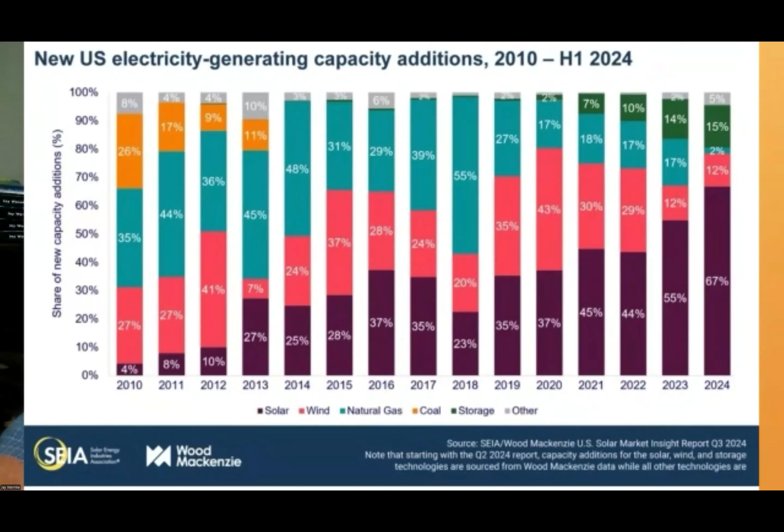Texas was the leading state for solar installations with 5.5 gigawatts coming online, nearly twice the capacity of second-ranked Florida. While commercial and utility-scale solar were booming, the residential segment of the market actually declined during the first 6 months.

This was primarily due to changes in California's net metering policy, where NEM 3.0 essentially reduced by about 75% the amount of money utilities would pay residential customers for feeding excess energy back to the grid. Since that implementation about a year ago, residential solar installations in California have declined between 57 and 85%, according to the California Solar and Storage Association.

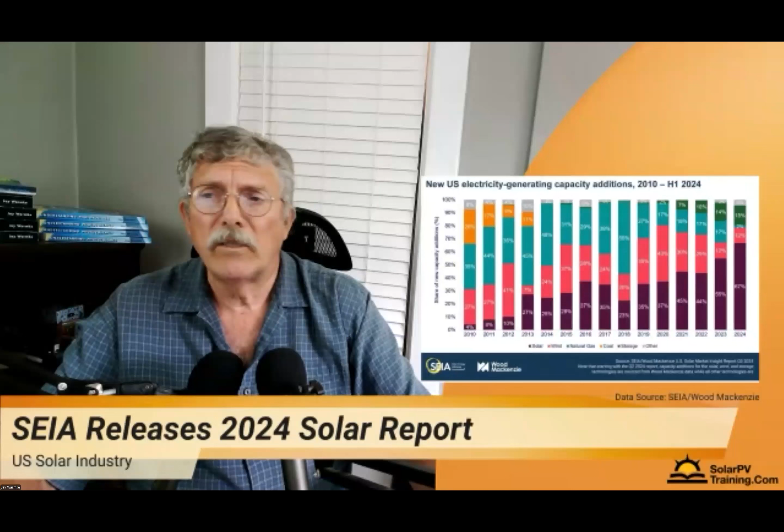Prior to NEM 3.0, California accounted for about one-third of all residential solar installations nationwide, so this has had a knock-on effect nationwide. When you add that into the mix, solar installations nationwide are declining at about 19% at the residential level over the first half of 2024.

The impressive rise of U.S. solar manufacturing capacity is very likely a matter of the classic good news, bad news kind of thing.

The good news is that solar module manufacturing capacity now exceeds 31 gigawatts, a fourfold increase over what was available prior to the IRA passing. Much of this increased manufacturing capacity is directly related to the 10% tax credit add-on for domestic manufacturing. If you use domestically manufactured products, you get an extra 10% tax credit when you install those components.

Now, the bad news for those who wanted to develop a domestic supply chain is that a significant chunk of these are actually Chinese companies simply setting up manufacturing facilities here in the US. These Chinese companies will have at least 20 gigawatts out of the 31 gigawatts available within a year here in the US, according to Reuters. The Chinese firms building plants are well-known names like Jinko Solar, Trina Solar, JA Solar, Longi, Boviet, and Canadian Solar, which always cracks me up that that's actually a Chinese company.

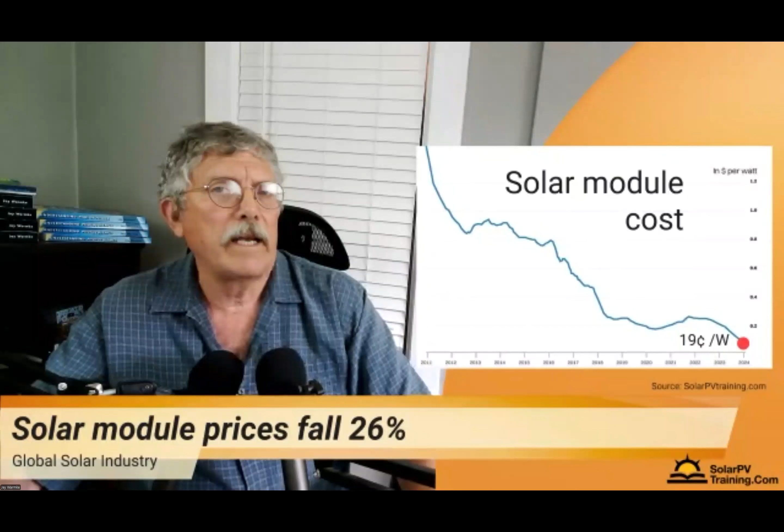For example, Swiss solar panel maker Meyer Burger announced that the 2 gigawatt manufacturing facility they were going to install in Colorado, at an old Intel semiconductor plant, is actually not going to happen. They've cited higher interest rates as well as declining module prices, which are really the result of low-cost Chinese modules coming onto the marketplace and increasingly pushing down the price.

In fact, globally, the solar industry has seen a 26% drop in the cost of solar modules in the last year, down to about 19 cents a watt, according to S&P Global Commodity Insights. And that is the news from the solar industry for this week.

Yeah, Pete, you've got something? Yeah. Does anybody, do you or anyone know how frequently the net metering 3.0 in California settles the account? Is it weekly, monthly? Where are they at on that?

Oh yeah, I think it's monthly. I'm pretty sure it's allocated on your bill, so if you're feeding back in. But it used to be, prior to this, that you would get full retail, and I think even a little above retail for it. And then they kicked it back down to avoided cost, so now they're only paying wholesale.

The knock-on effect of that has been, in California, a significant drop in the amount of solar installations because the economics of it are not as pleasant as they once were. But also a huge amount of solar storage is being put into these systems because essentially they're setting it up for self-consumption. It's like, if you're only going to pay me 4 or 5 cents, I'm not going to sell it to you, I'm just going to keep it. So you can put in batteries and do the solar storage.

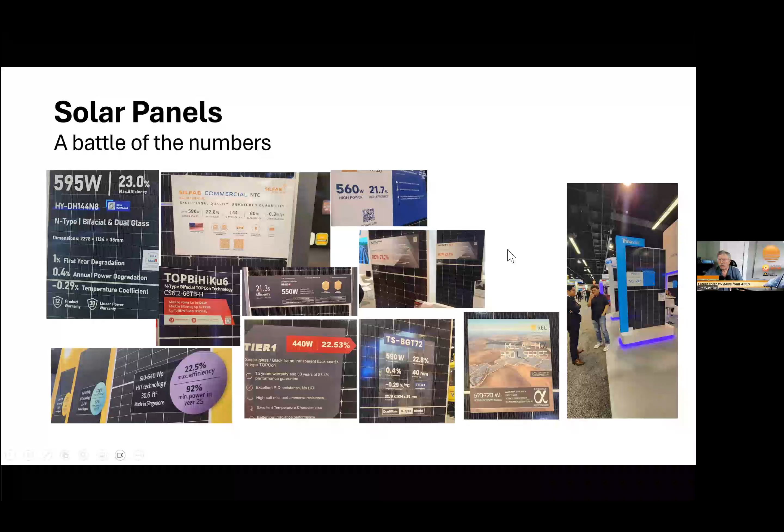I always think of these things like solar panels are sort of like boom boxes in the 80s. Everything gets bigger and bigger while the rest of the world is getting smaller. But there is a limitation of course, like 50 pounds from OSHA as far as one person carrying it, and I think a lot of these bigger panels have to be targeted towards the ground-mounted marketplace, because trying to get these whales up on a roof would be difficult.

Yeah, I should say on my biases, we do have enough space, we are going to do a ground-mounted system, and actually choosing the format of that to take up as much space as necessary to meet our demand. By the way, if you don't know how to calculate demand, I know a guy who runs a really cool course you can take on calculating your demand and building your system.

Choosing whether to go with fewer large panels or more small panels, with fewer larger panels I can use fewer optimizers or microinverters, depending on your architecture, but on the other hand it changes the geometry of your mounting system. So I haven't found a set of good principles on that, except for empirically building it myself. If anybody's already really good at doing the calculus around panel size and racking efficiency, I'd be a very happy student.

I'd be curious to see if there was a decline in bifacial panels. Bifacial had a big, robust growth spurt because the tariffs imposed on imported panels forgot to include bifacial panels.

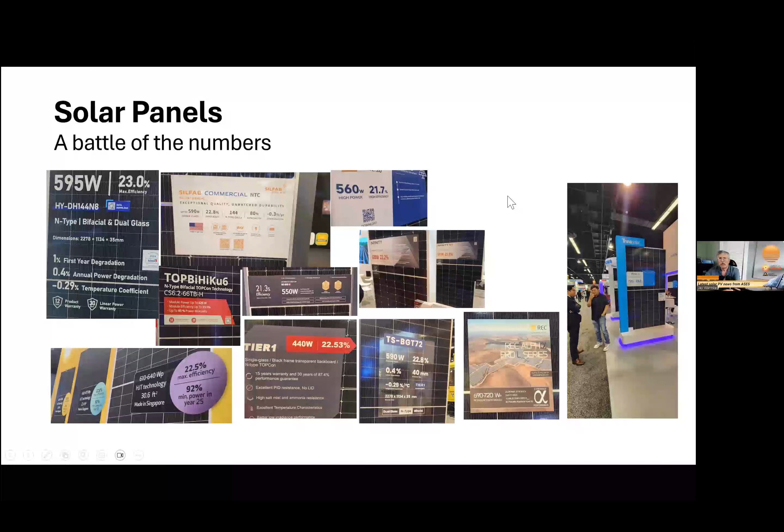In case you're not familiar, bifacial panels can absorb power from underneath as well as above, with cells on both sides. They wouldn't really work well on a rooftop mounted system, except maybe a ballasted system, but they're definitely good for ground mounted systems, especially on sand or snow fields or anywhere you get an albedo effect where light reflects up to the underside of the panel.

Amen. Yeah, in fact I got some stats here. I tried to show some key concepts and the ranges I saw at this meeting. Total watts, I don't think there were very many places under 400 watts at this point, but the trend is towards bigger stuff.

Conversion efficiencies are in the high teens and low 20s. I did a little research here, and that looks like it's been growing about 10% over the last half decade.

Temperature coefficients are getting very, very small. For those of us who live in cold temperatures, that's a bit of a mixed blessing, because I might actually like the extra efficiency I'd get in the winter, but it is what it is.

Bifacial panels, now you have to be careful when you read these things, because they'll say they have 80% or 85% bifacial efficiency. All they're really saying is the rear-facing panel is some fraction of the efficiency of the front-facing panel. But what's being reflected off the ground below, whether white stone, sand, concrete, or whatever it be, gives a number much smaller than 80% additional. That number is probably going to be in the sort of 30%-ish range.

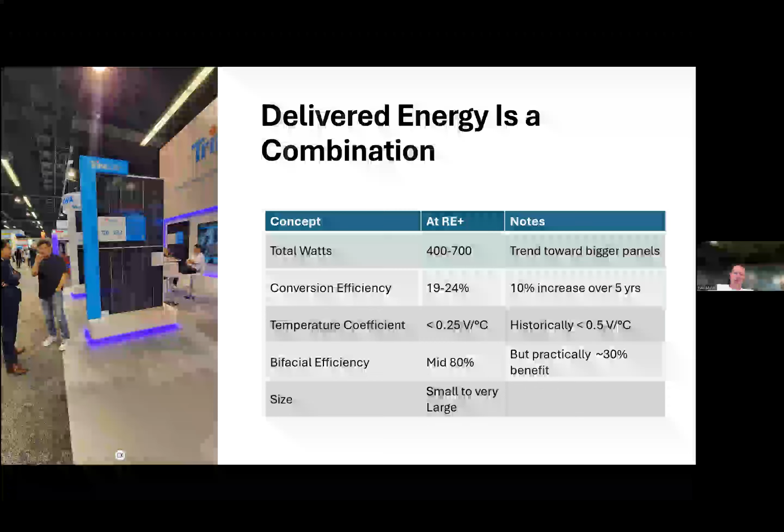Again, that's one of those things where that 30% number, you should have a wide range of uncertainty about whatever number you use. And of course, size ranges from very small to very large.

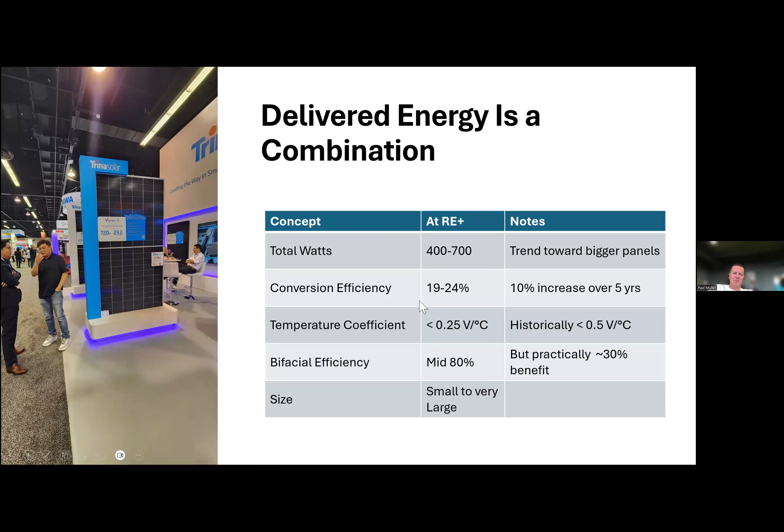Just as a benchmark, if you're paying more than 30% more for the panel because it's bifacial, and you're getting 35 or 30% more power, that's going to be your break even. So it doesn't make sense to go bifacial unless the cost benefit works out for you.

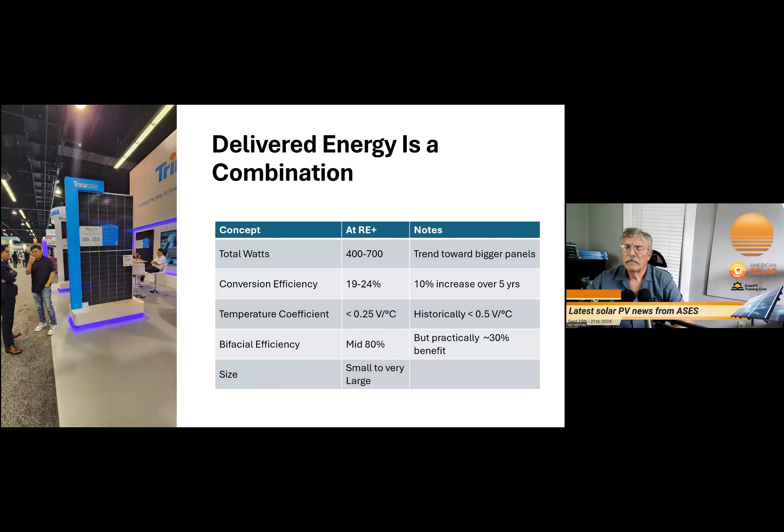Absolutely. I did see a couple of things. Tesla has been the preeminent, at least from a marketing perspective, proponent of shingles on the rooftop. There were several other companies, some new entrants, especially for metal roofs, with products that looked a lot like metal roofing material.

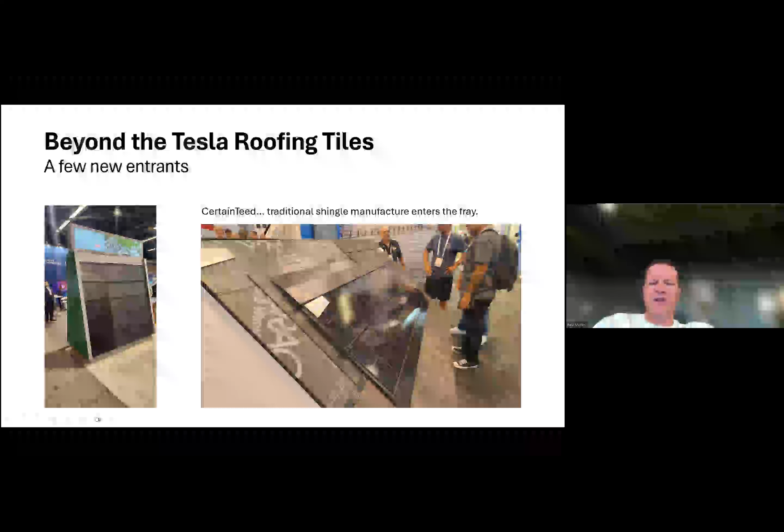This may not be news, but it was for me. CertainTeed, a manufacturer of traditional asphalt shingles, was the first traditional asphalt shingle company I knew of that was actually trying to insert itself into the market. Maybe somebody on this call knows they've been doing this a while, but they have their own panels that connect in with their own asphalt shingle approach. I don't know whether other companies are in this space, but I thought it was remarkably agile thinking for a traditional asphalt shingle company to think about their role in the solar energy space.

So I don't know, does anybody else know if this is new stuff, or is this just the first time I had seen it?

I think GAF is also doing the same thing. I saw them at a show several years ago.

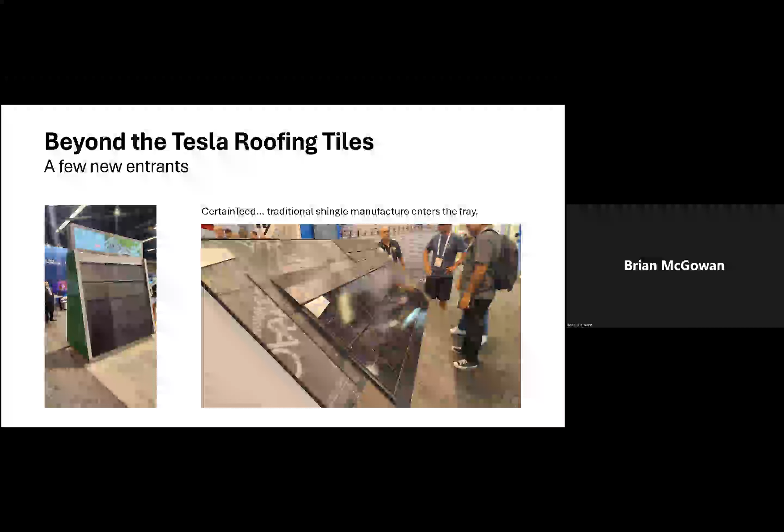That'd be believable. Anyway, you think about these shingling companies as sort of the knuckle-dragging producers of the stuff we've been sticking on roofs for a long time. As a guy who's been involved in technical innovation for a long time, to see them thinking this way, I think was notable.

Yeah, if those who've been on these calls before know, I'm relatively biased against solar shingles, largely because the thing I always ask is, if there's innovation, great, but what problem is it trying to solve? And it's typically just aesthetics. There are better ways of dealing with aesthetics.

If you have a problem with one of the elements, now you've got to rip up a whole section as opposed to just replacing the one panel. They also tend not to be offset as much, so you get heat issues involved there.

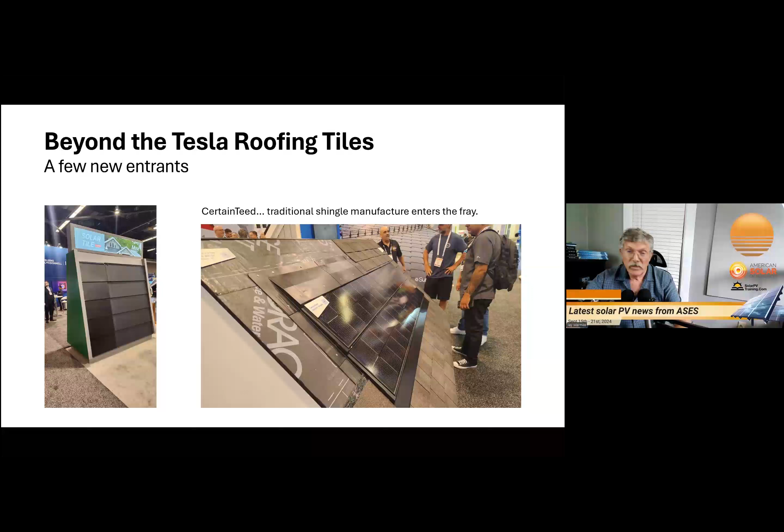You get wire management issues involved there, and it seems like it's a big mess just to try and solve a problem that can better be solved using other techniques. So, amen.

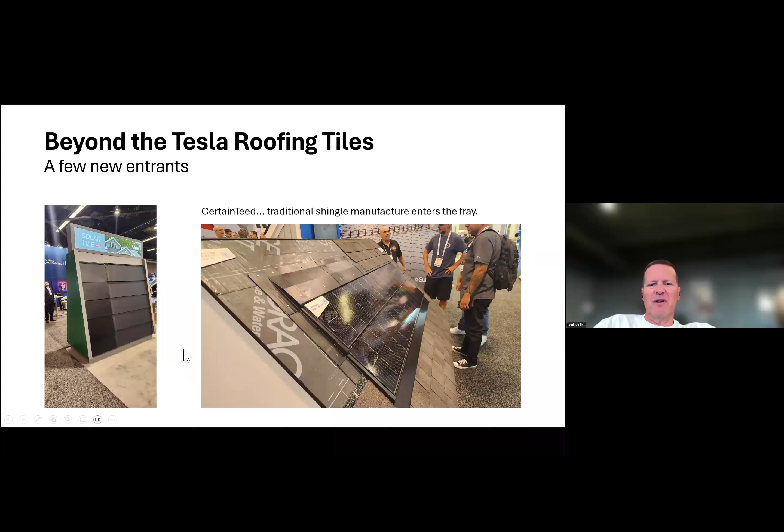I think the same thing is going to come up when we talk about racking systems and sun tracking systems, where you can get another few percent, but is it really worth it? If you have the space, just put another panel. It's a lot less expensive way to do it.

Durability - I have heard and seen some things about durability in this space, and I've got a second page on this. But I did start to see more and more people talking about hail damage. I'll show you on the next page what folks from Jinko are doing.

There is an ISO standard, an IEC standard for this, but you'll see lots of different claims around this. I did end up talking with somebody at Mission Solar for a while, who was one of the few really articulate people about what contributes both to the degradation of a panel, but also its durability. I'll talk about that in a minute.

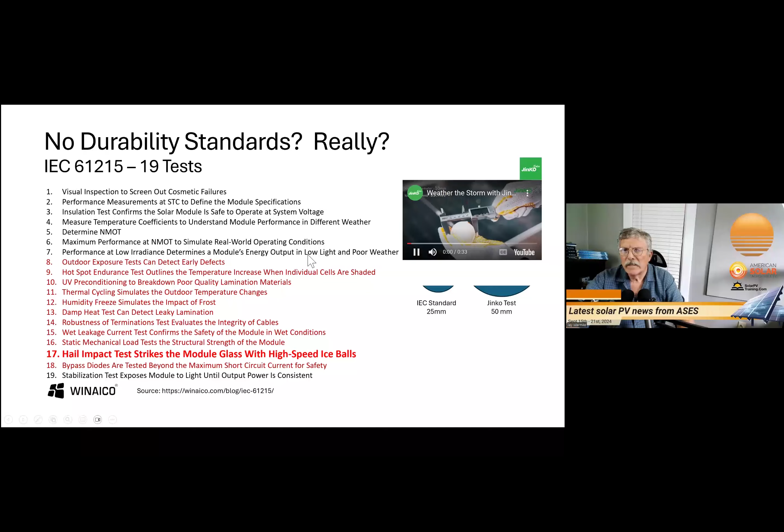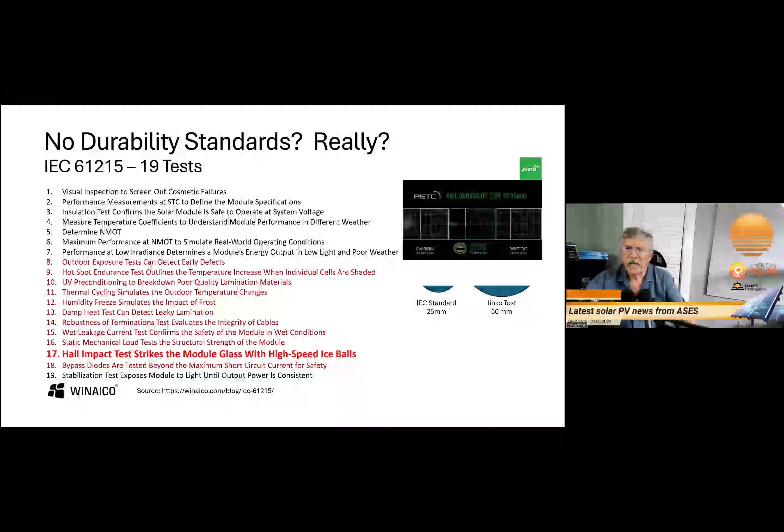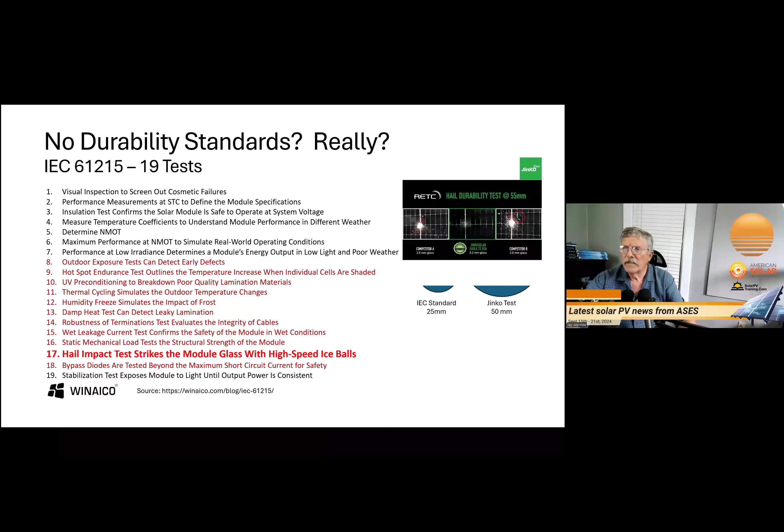I just included Jinko up here because they have an interesting video here, which I have included. I would probably think that the hail thing is a reaction to the increasing number of storms in Texas specifically. There's been some huge increase in insurance losses, especially for the utility scale folks and the commercial scale people, because they're just getting pelted when you get hit with one of those big hailstorms. So I could see that being marketed towards the big boys. The homeowners don't really think about it that much, but for these guys, it's a big deal.

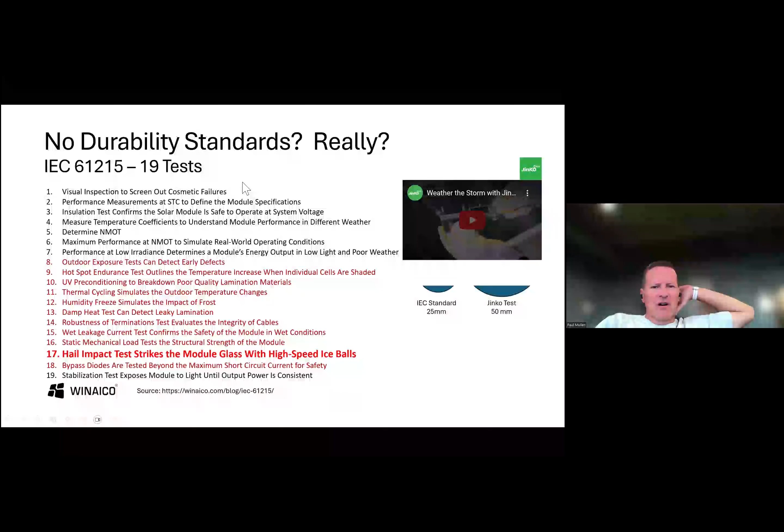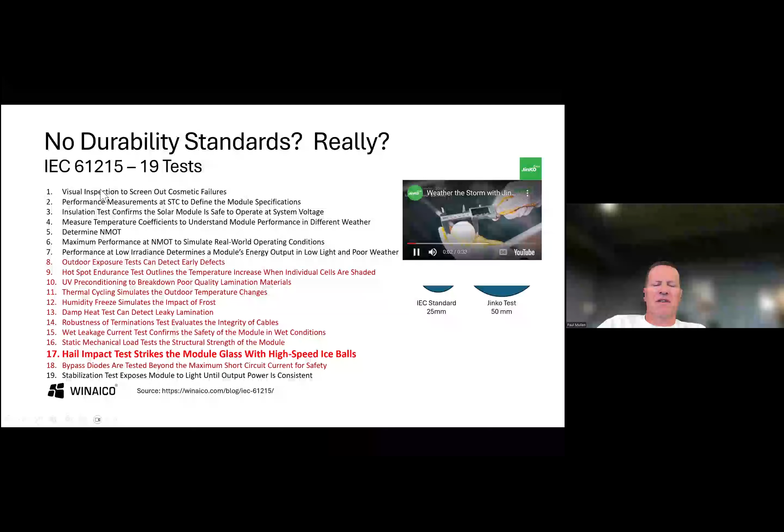By the way, in the earlier version of this presentation, I said the measurement standards are evolving, and I expected somebody on the call to say, hey Paul, look at IEC 61215, because in that there are 19 different tests that establish the performance and durability of panels.

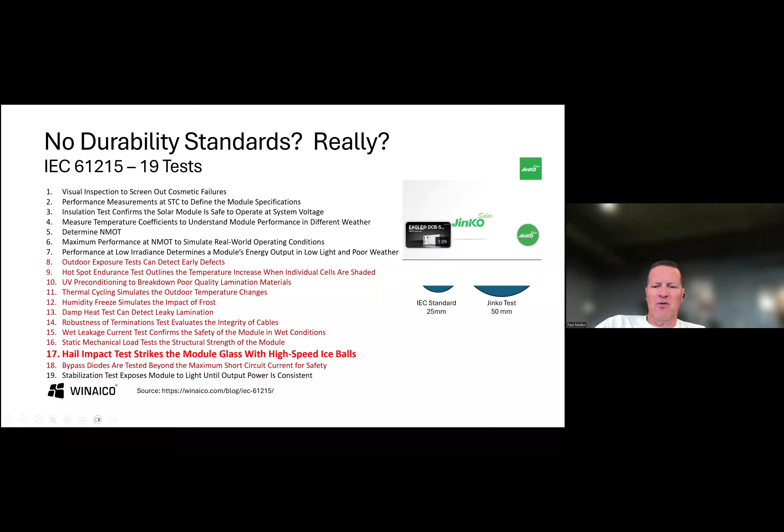What's very interesting, this is from the Jinko website - the IEC standard talks about a 25 millimeter hail ball. They test theirs with a 50, and you're supposed to be impressed by that. But in fact, though this is a bigger ball, potentially a heavier ball, the radius of curvature is quite different, so you would have potentially a different way of shattering glass or whatever your standard is.

By the way, I just did this - the red color here versus black color out of the IEC 61215 standard is really showing performance stuff in black and durability stuff in red. So there is a standard out there. I think it is evolving.

These guys from WINAICO, I used their descriptions of this because I thought they were the most clear, but clearly you can go to 61215 and get the exact same thing in the official language. In any case, the link is there if you want to find it - it's winaico.com/blog/iec-61215. But I just think that when you start to run out of performance standards as your differentiator, people are starting to put in durability as a potential thing.

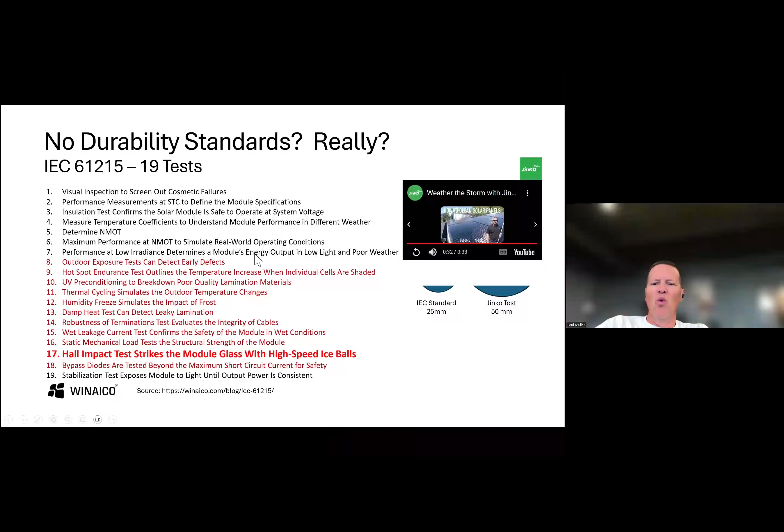Jay, I suspect you're right that you'd have to either be industrial scale or be a very savvy homeowner to start thinking about this. Most people are just saying, do I make money or not money when I put up solar panels?

I had a good conversation with this guy from Mission Solar, who clearly has a point of view. The question I was asking him is, why is it that solar panels degrade in their performance over time? Why can't I say 100% of its installation efficiency at 5 years? His explanation, which I found quite credible, was that the layering of this set of materials is essentially a lamination process, and that lamination process is not perfect.

And because it's not perfect, you get some defects in that stack, and those defects lead essentially to heat-related failures. Having then those heat-related failures don't happen across the whole panel, they happen in isolation.

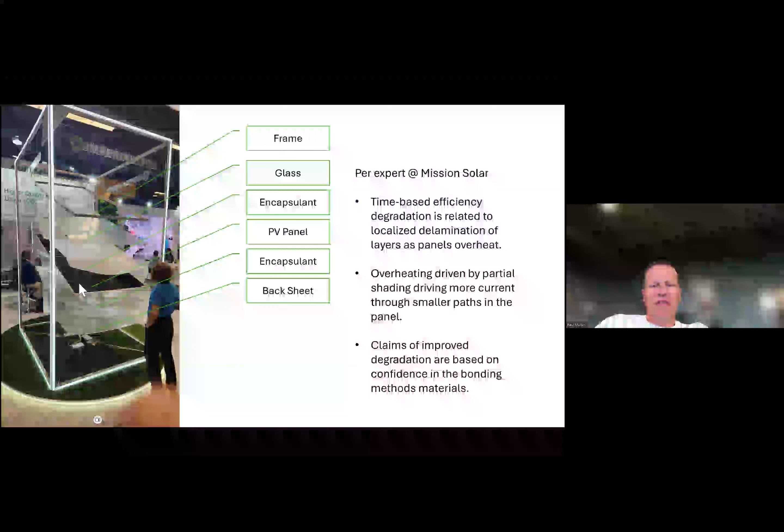Because these defects happen in isolation, they don't necessarily degrade everything as quickly as you might expect. The claim from Mission Solar, as represented by this guy, was essentially that they're more and more confident about the quality of their lamination process, so they don't expect localized defects that would decrease solar efficiency over time. That's why they can claim much better performance than you might otherwise expect.

So maybe that's helpful. I don't know how credibly to take it, but he seemed like a guy who knew what he was talking about, in an area where I, as an electrical engineer who knows what goes into the silicon, don't expect the doping to change dramatically over time. So what is it that's actually changing the efficiency of the panel? His description of something mechanical was actually quite credible, so I offer that to you as a potential hypothesis.

I'll also add that the better they are at laminating these things together, the harder it is to recycle. That's probably true, and it's something we're going to be dealing with.

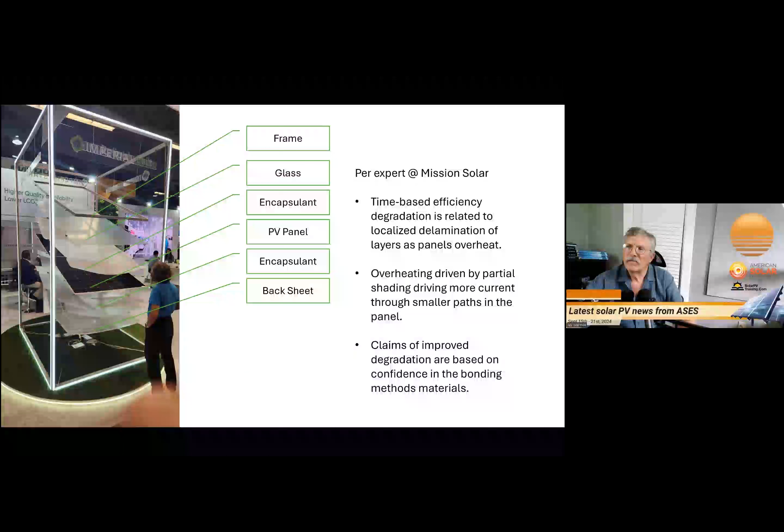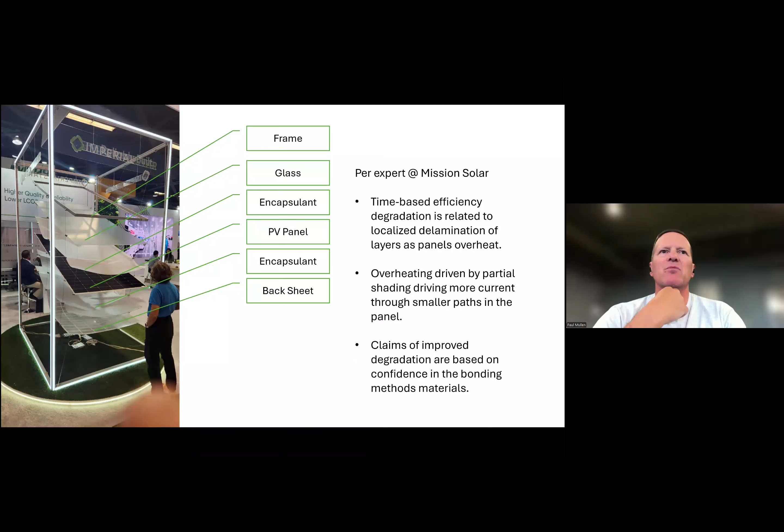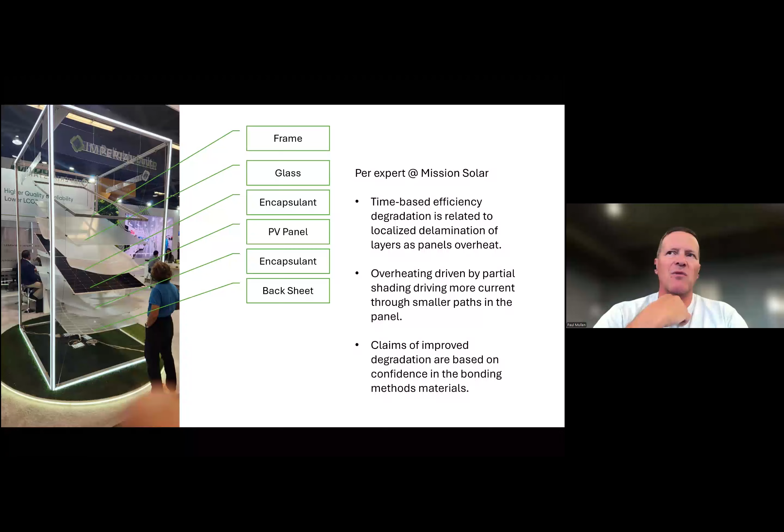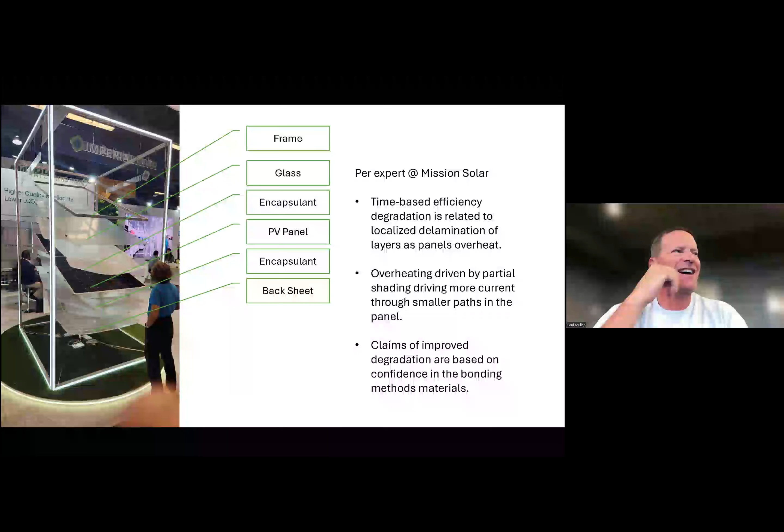By the way, I did stop in at a couple of recycling companies, but I didn't put that in this presentation. The reason is, in our home we have a temporary solar installation not discussed here. We bought a bunch of used PV panels from some company, I don't remember who, and have them plugged into EcoFlow batteries to run the barn and charge our electric tractor and gator, basically off the grid. But we had them placed on the ground too close to the barn, and a bunch of snow fell off the roof and broke the inexpensive used panels. So we just bought some more used ones because they were very inexpensive.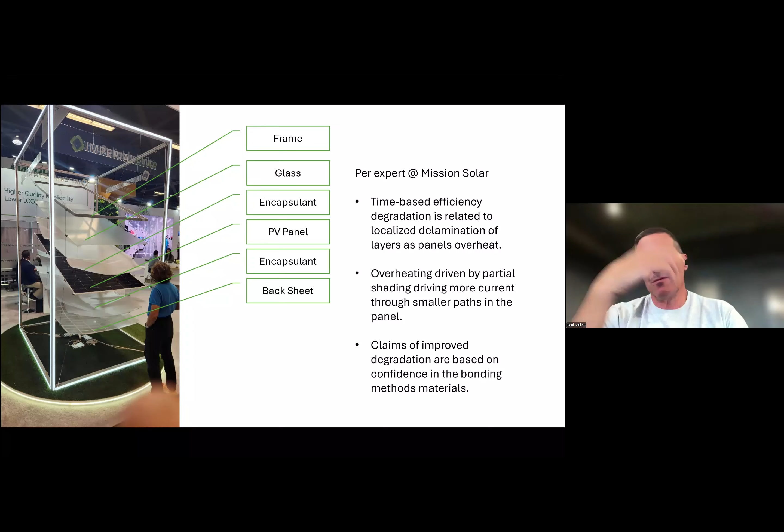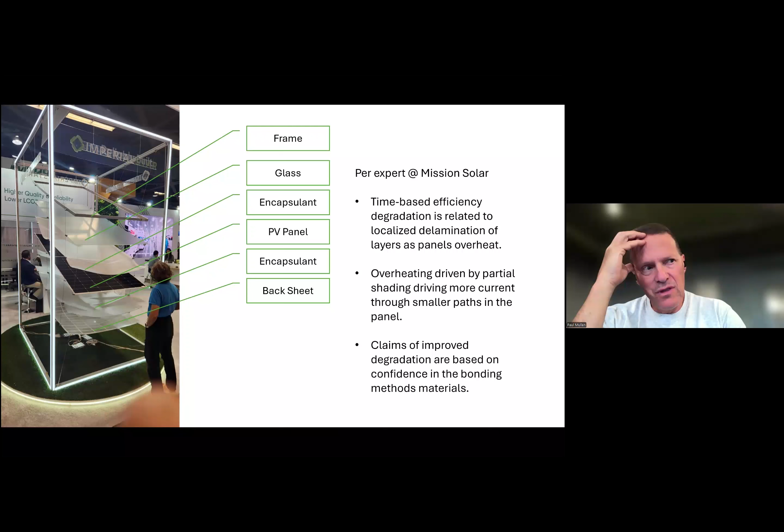In the reuse, recycle space, the reuse part is pretty obvious, the recycling part is not quite as obvious, and I think that's really worth valuing. What I'd say is, for those of you doing your own installations, look at the used panel market, because you can get very good panels at a very inexpensive price simply because they're no longer state of the art.

Also, as these panels get bigger, nothing's less than 400 watts in the new stuff, but the distributors tend to want to get rid of their old stock. So if you're not worried about getting a 370 or 350 watt panel, and if you're putting in Enphase microinverters, it really doesn't matter much since they're only going to go to about 290 anyway. You can pick up some pretty good deals if you're willing to take some of the older models—like your iPhone 15 or whatever, I don't know where they're at, but you get one and it still makes phone calls.

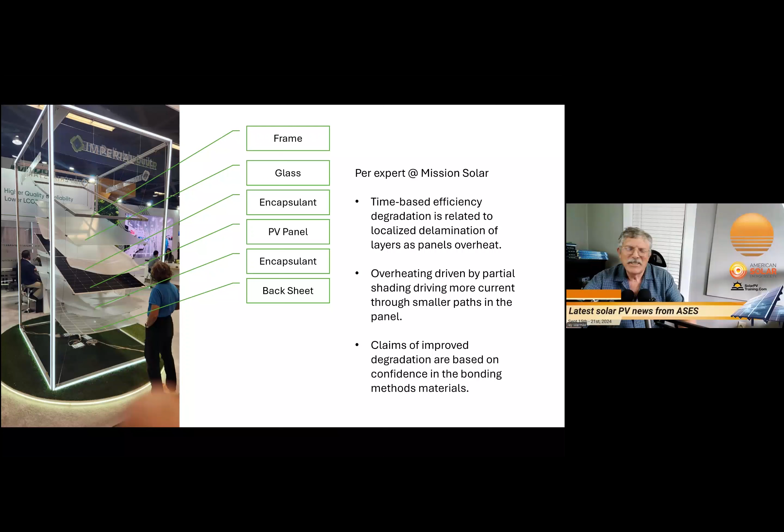I'm an Android user, and I'll tell you, if you're on the iPhone, we do have medicine available for that now. I did not try to.

And of course, if you're following the new SolarEdge—I follow SolarEdge because of my interest there—they're starting to combine inverter, grid tie-in, and other balance-of-system components into a single product that's not available yet. But you'll see more and more announcements as they start to put what we'd consider something other than an inverter and panel into a single unit.

You could have put out three or four more examples on this page, but simply combining components was an interesting theme. I'm a bit suspicious of it for those on this call who might be trying to build best-of-breed systems that have the best panel, the best inverter, etc., etc.

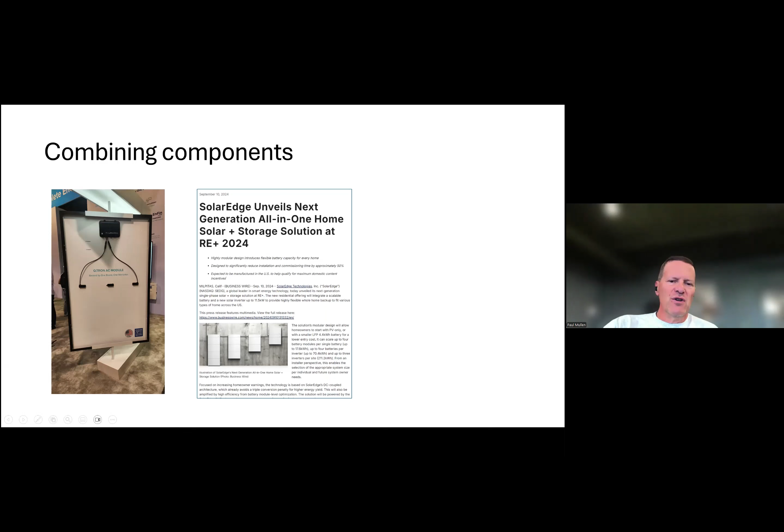It's harder to do with these kinds of things. But for those looking for speed of installation or efficiency of installation, it's a pretty interesting concept.

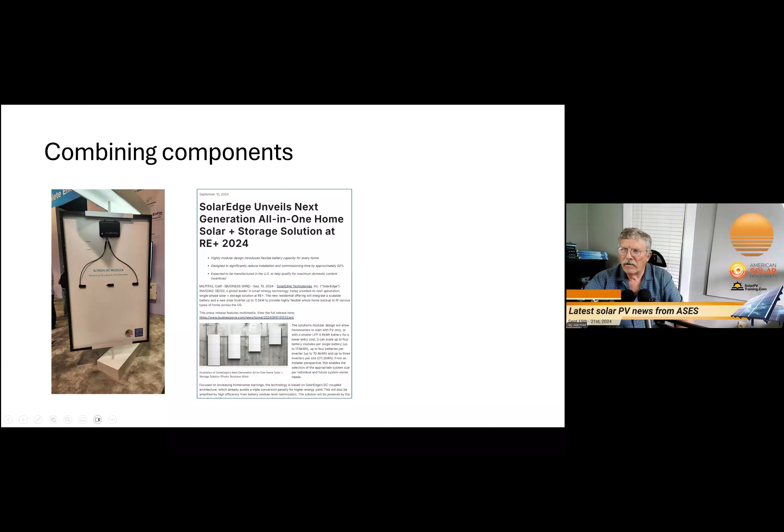Yeah, I tend to like the modular approach, because if one thing goes bad, you don't want to have to replace them all. This feels like a planned obsolescence kind of move where all of a sudden you've got to send the whole unit back, and like you said, it's not that hard to bolt a microinverter to a panel or to a rail. This doesn't save much.

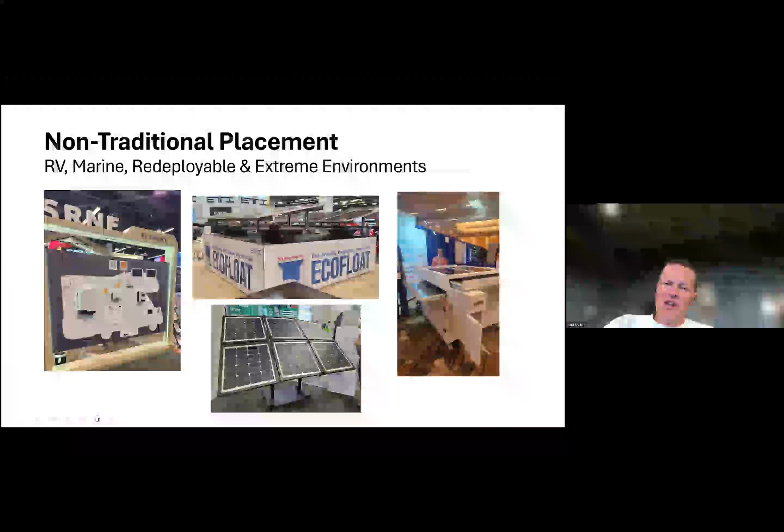RVs, boats - this is a floating dock with panels on it, and then several different systems you could deploy for emergency power, with a number of people talking about humanitarian rescue kinds of situations. I really didn't understand this one company that had this massive towable trailer, which did not appear to provide a whole lot more power than just folding up an array and slapping it out there with an inverter. Not quite sure what they were thinking here, but nevertheless, a lot of work on non-traditional placements.

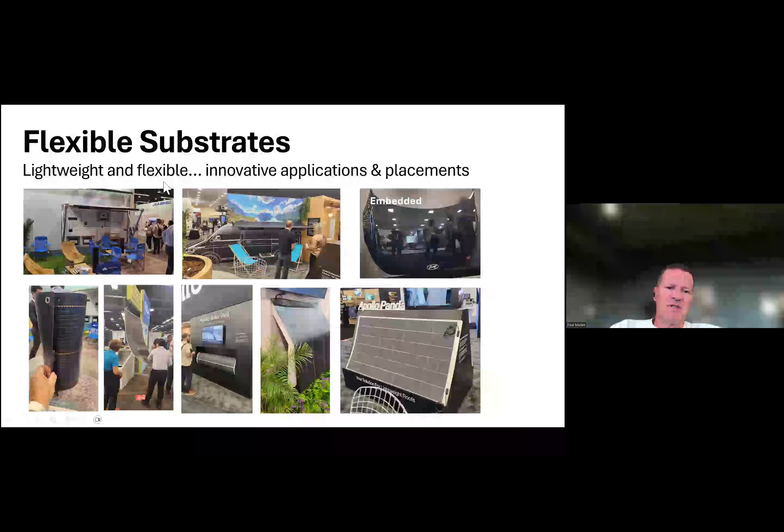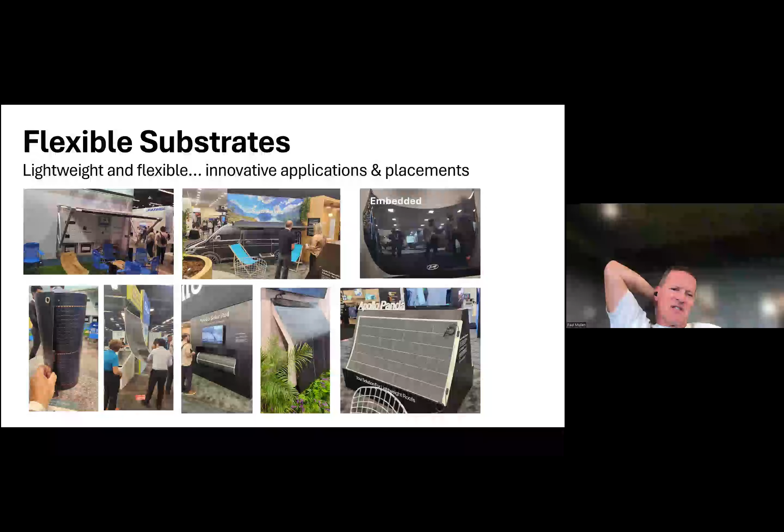You can kind of see, I've got the movie playing here. This was a particular company doing awnings that roll out or slide out, and you can kind of see it working there. There's a number of these kinds of things out there.

By the way, my good friend Greg Ballinger is on this call. He's interested in doing this stuff on boats. So if you're interested in deployment of solar energy on boats or in boatyards, you might want to talk with Greg.

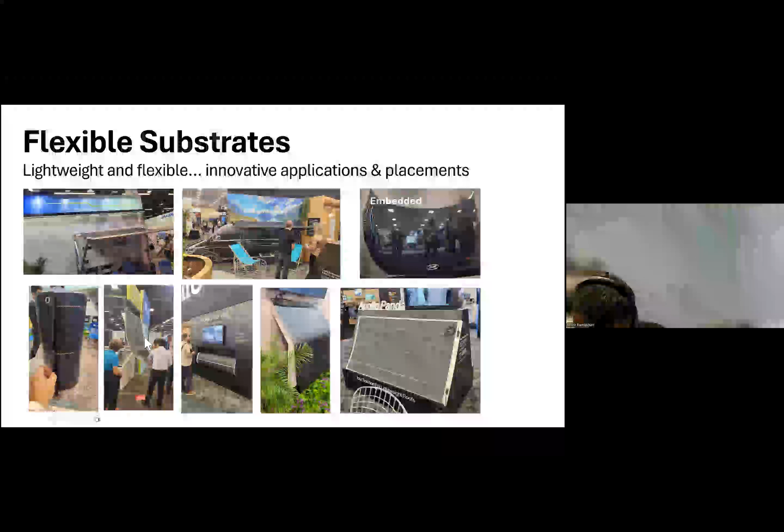But nevertheless, you can see these flexible - I'd say cloth-like, they're still pretty heavy, maybe more canvas type. There's also a few companies looking at not necessarily rollable, but quite flexible panels that could be put into a variety of applications. Some of the people here were really interested in this being a lighter weight solution than a normal framed panel.

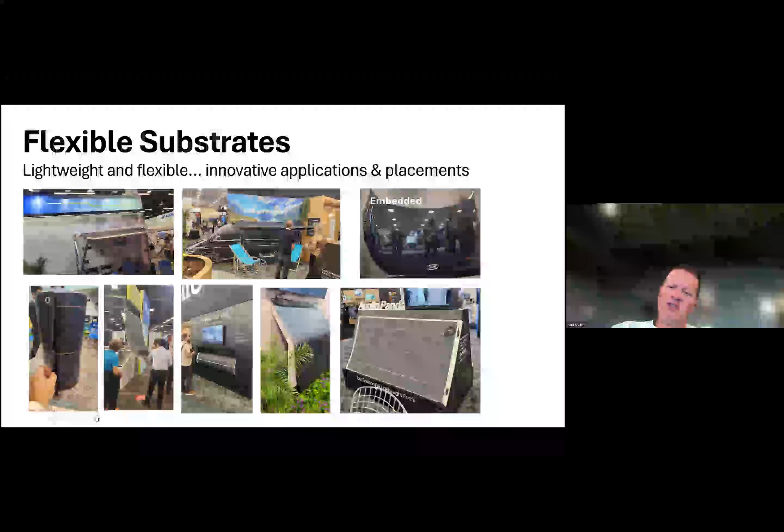And then finally, there were a few places starting to show some embedded stuff. This is a Hyundai windshield that's got some embedded PV in it. But that was kind of the theme there - how else can we mount these things?

Jay, anything you want to comment on there? Yeah, the kind of rollout, solar fabric thing - there have been some innovations like canopies for farmers market tents, things like that.

Yeah. And for a while there was a neat video I play in class where it's like an emergency responder trailer where you haul it out there. It's got all the batteries, all the other things, and then you take it and stake the solar panels into the ground and drive off, and it unrolls this huge array behind the trailer as you're moving across a field. So the installation happens in just a couple of minutes, and you get a very large array.

It's sort of like the trailer you were just pointing to, only a little more efficient, I think. Interesting. Yeah, I think one of the problems with some of these deployable systems is it's hard to deploy enough area to charge the system in a reasonable amount of time.

But if you're in a boatyard, you're not on your boat every day, but you want to charge it while you're at the pier - this provides a reasonable option.

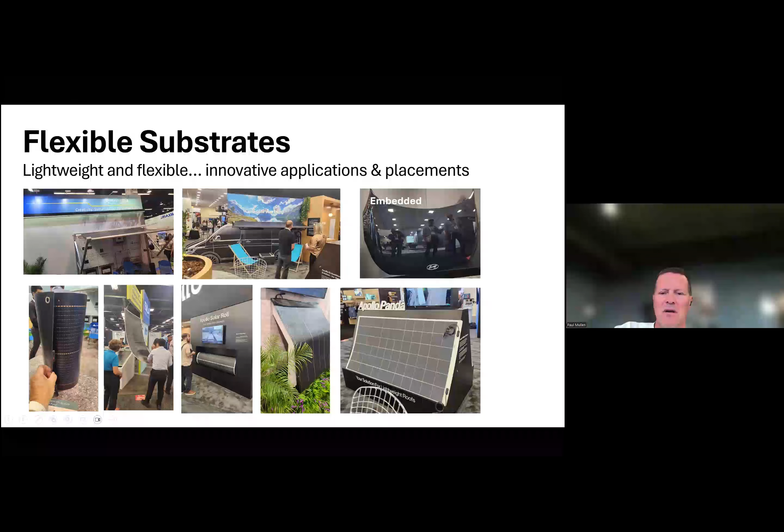I also have seen some stuff, largely out of Germany, where they mount these things on the railings of apartment buildings, essentially, with a microinverter already built into it. You just plug it into the wall and you can recharge your house - pretty slow, but at least it's non-zero. And I think innovation in this space will continue as we go.

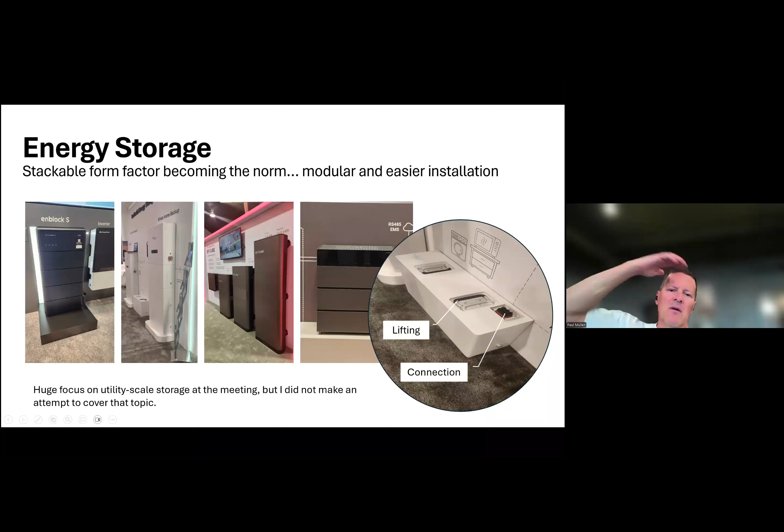Energy storage. Wow, if there weren't enough panels in the building, I can tell you there were more than enough energy storage systems. Everywhere you turn, obviously there are a lot of people trying to move away from traditional lithium batteries. Lithium iron phosphate is an interesting one, and there's some people looking at sodium batteries. I think a lot of that is pretty early days.

But the thing that was clearly true is that most places I visited were looking at stackable systems, so you're not putting in one giant Tesla Powerwall, but rather sort of stackable modules, with two design intents here. One was simply that it becomes modular and you can decide how much storage you need without overbuying or underbuying. The other was installation, because those very large batteries often require at least a two-man crew, and here a single installer could do it.

I've zoomed up a little bit on this module you see right here. What you see is they have a connector that would connect the module below to the module above, and then they just have handles to lift it into place. Not all of them did it exactly this way, but this idea of modular storage comes largely from the ability to just stack them one on top of another.

So you're making a parallel connection when you just lay it down on top? Exactly. And did you see any solid state batteries there? I'm sure they were there, but I did not see any, though I looked for them.

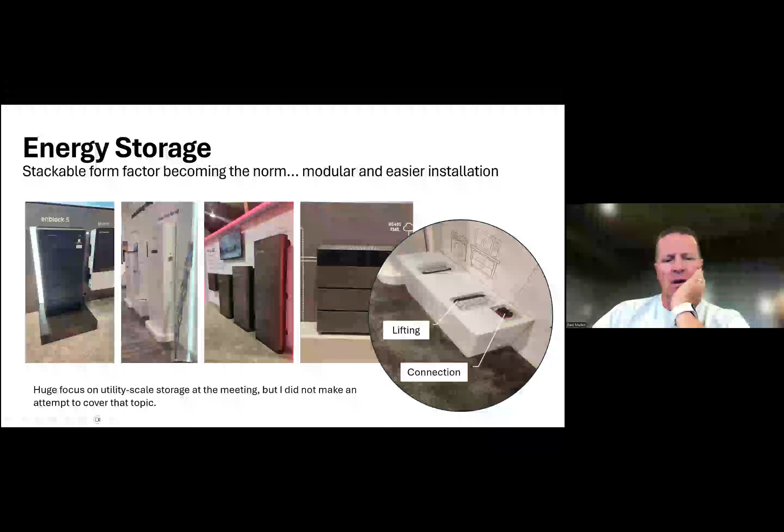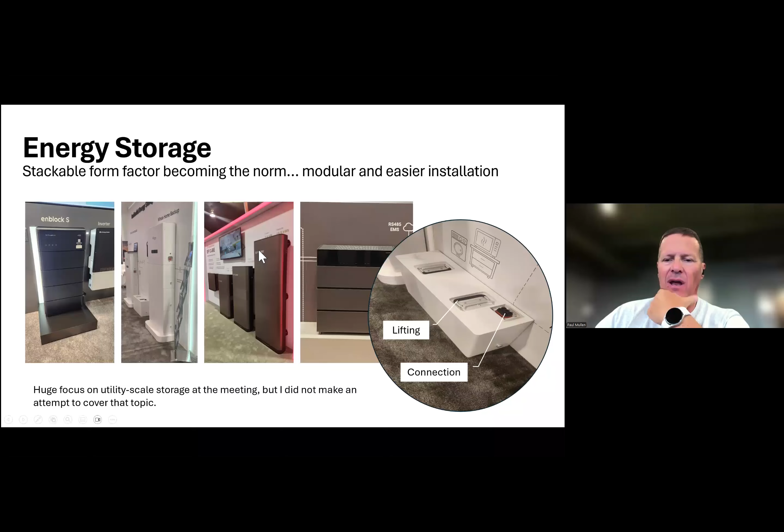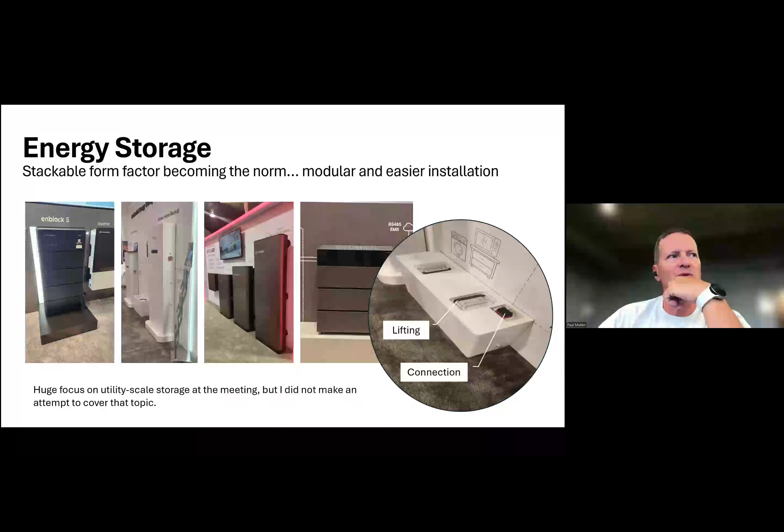Was your impression that these things are commercially available, or was this a lot of vaporware? At least some of them are available. I don't know whether enblock or whatever company this is, I don't know that they're all available. I know for sure, because I have a friend who works for EcoFlow, that their modular system is available. EcoFlow, Jackery, and Anker are all in that portable power space, rolling out battery stacks. They do have these modular stackable systems, and they are commercially available. I guess they're technically available too, but I can't say that all of these larger systems are necessarily available -- at least some of them are.

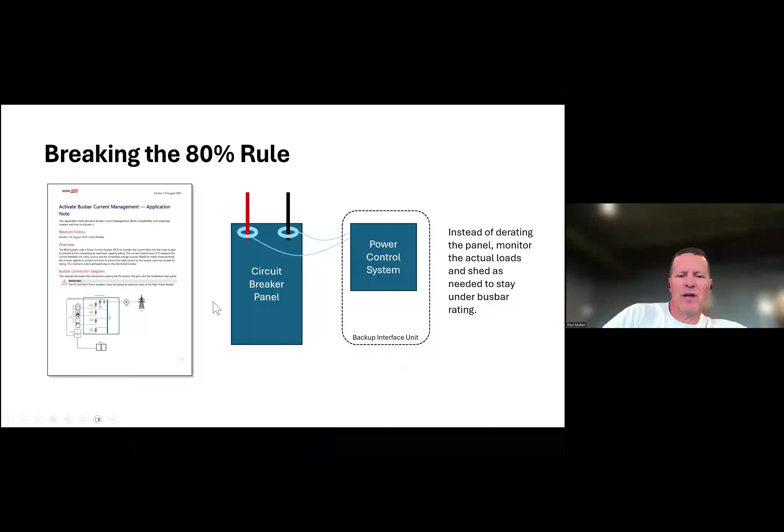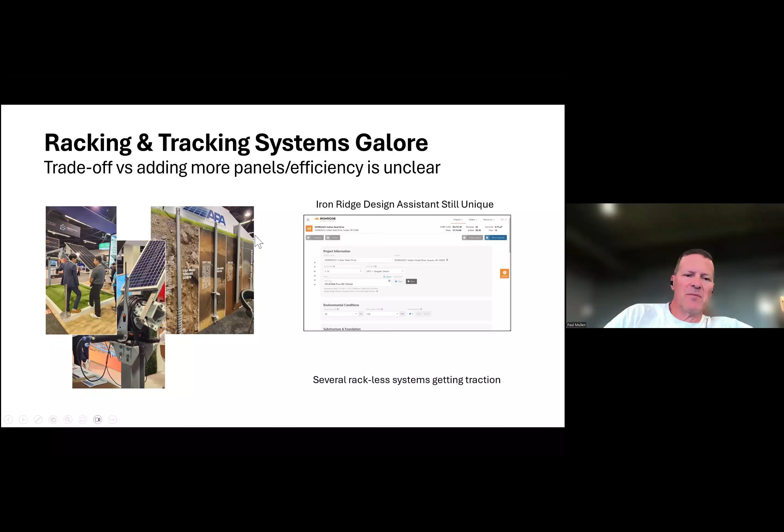Racking systems everywhere -- I've seen a ton of them. If you haven't used this Iron Ridge Design Assistant to build racking systems, it's the only one I know of out there. I asked a bunch of other companies about it, and still nobody's doing it quite like Iron Ridge is. For me, I love that -- it biases me a bit towards Iron Ridge, because then I can iterate my design a bunch of times without calling and recalling somebody every time I want to do design updates to my racking design. So I thought that was quite interesting.

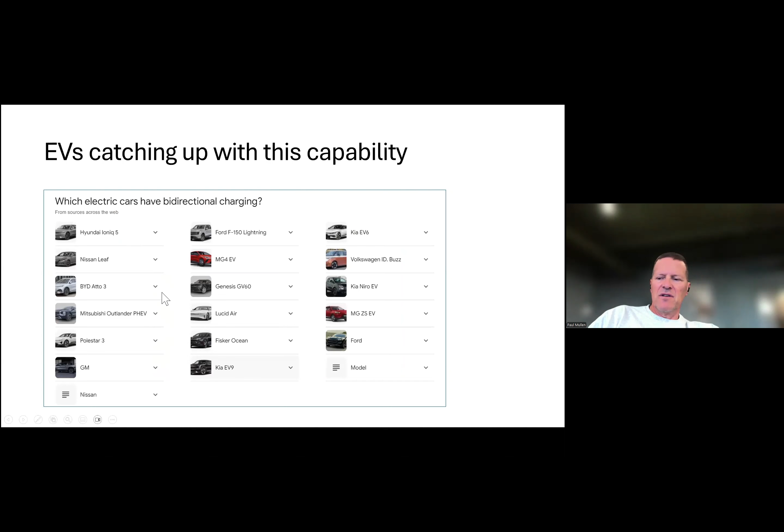Jay, you said some very articulate things a moment ago when we were talking yesterday on this topic, anything you want to add? Yeah, the bidirectional charging thing is definitely looming out there, but it does have to be standardized as to the protocols they use. The Ford F-150, for example, is definitely bidirectional, but has its own proprietary system, and probably some of the others do as well. I know the Nissan Leaf, if I recall, was the only car, at least up until recently, that said they're willing to work with anybody, though that may have changed. It's like this could void your warranty, that kind of thing. So these are all things that have to be worked out before this becomes super practical.

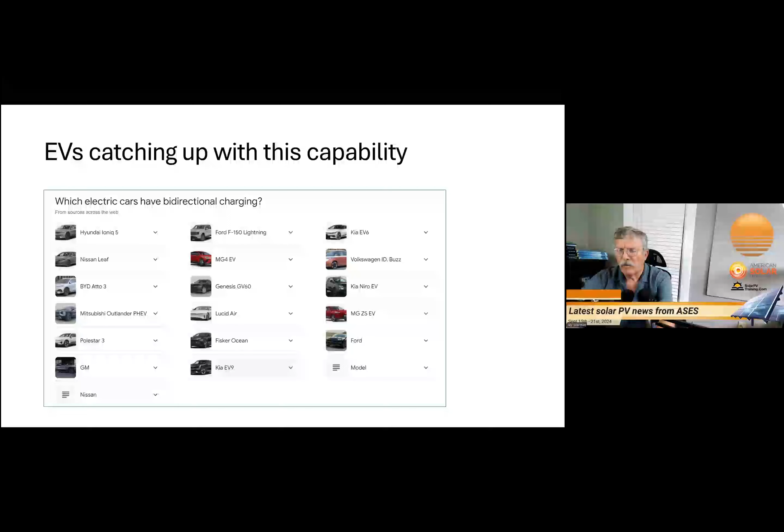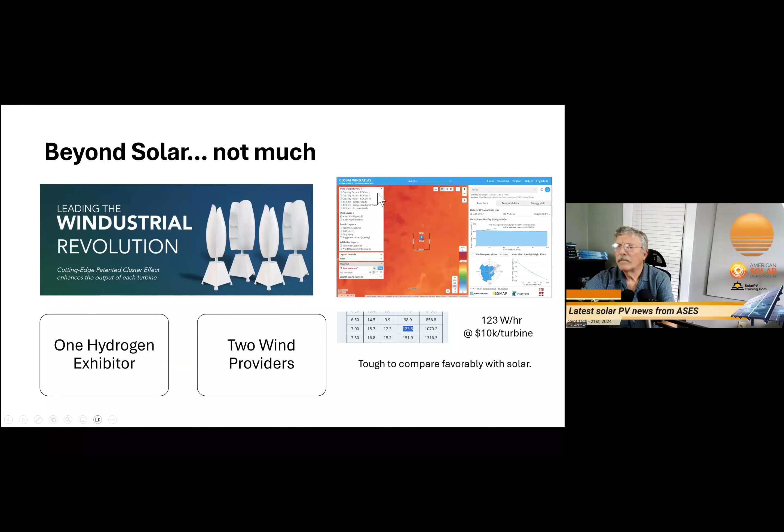Beyond solar, there wasn't much. There were two registered wind producers. I visited one of them, couldn't find the other. Here's the challenge, I really like the design here, I think it's beautiful, a really cool idea. They've got different modules, another smart company, but...

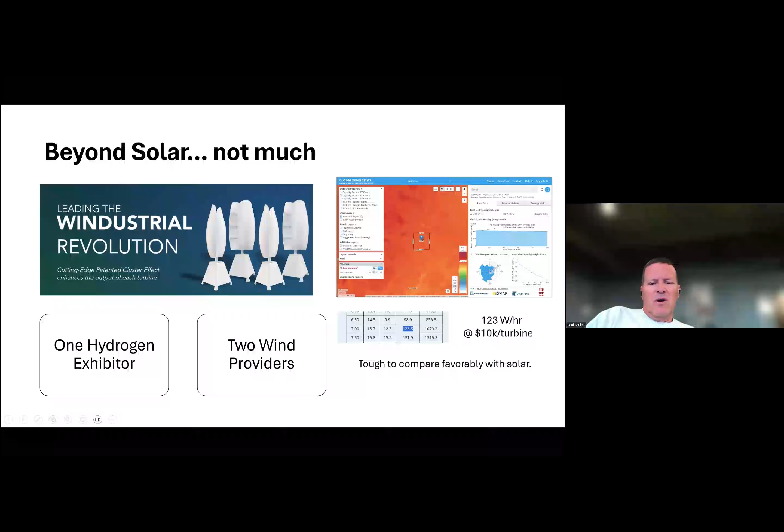123 watts per hour in my neighborhood. By the way, you can go to a website and figure out what your typical wind load is, and this was mine. So in my area, I'd get about 123 watts an hour for a $10,000 turbine. I'm thinking, well, let me just add some panels.